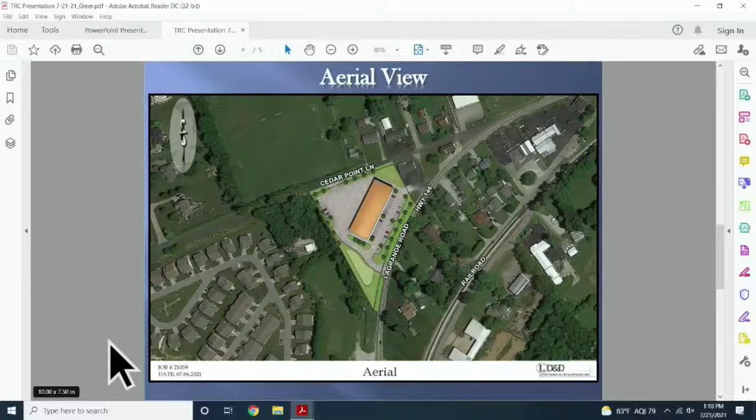You mentioned you're coordinating with the state with regard to the entrance on Kentucky 146, those two entrances. And as Tom McIntyre mentioned, the traffic impact study will be required based on the trips generated from the site and the volume of traffic on 146. We've been in coordination before this with the state and LD&D to coordinate the scoping of that already. That's already started, so that is the extent of my comments.

And I've got a letter here for you. I can give you the original if you'd like. Matt?

I really don't have any comments. We'll just probably end up using the 4411 address, and then we'll use suite numbers depending on how many applicants come in. We'll just permit them like that.

The only other thing I would say is just get with the LaGrange post office to see if there's going to be any requirements for centralized collection on 146. I'm not sure if they're going to want to come into the development to put up a box, so there might be something along 146 that they might or might not require. So that'd be the only thing.

Buckner. Oh yeah, Buckner. It probably would be Buckner. I'm not really sure, they have a weird setup. I would just contact them and try Buckner first. But that's it, that's all I have.

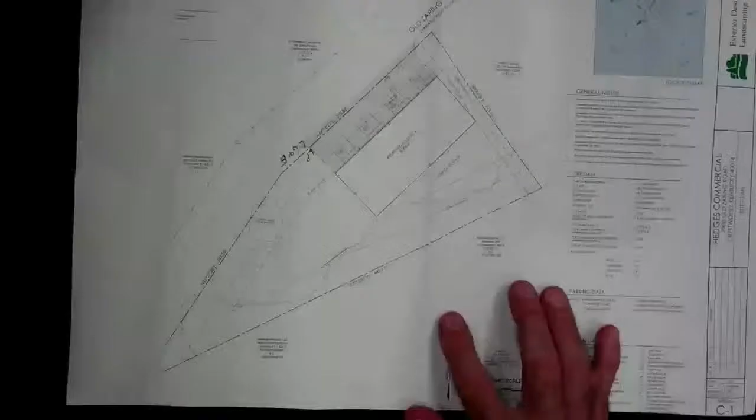So in order to accomplish what Mr. Hedges would like to do on the property, it's going to require us to have a zone change. The property is currently zoned R2. We're asking that it be rezoned to C1. It's just a little over an acre.

This plan was done by someone who used to work for Exterior Design, which is the company Mr. Hedges owns. The gentleman's name is Ted Bernstein, who actually works for LD&D. So when we update our plan after your comments, we'll have Mr. Bernstein from LD&D make those updates for us.

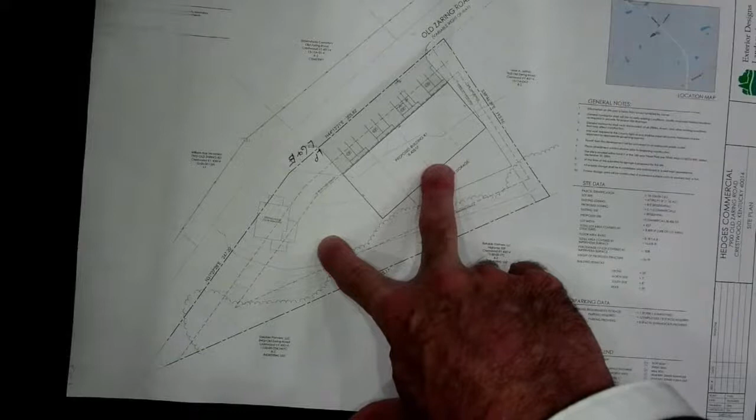What this shows is the property that was actually 2 lots, which have since been consolidated into a single property, a little over an acre of land on Old Zaring Road. The road goes back this direction towards the Rogers Group property. I don't want to say with absolute certainty, but the road, at least at the end, was closed. I don't know if it was closed all the way up to 329. So this is essentially a dead end road.

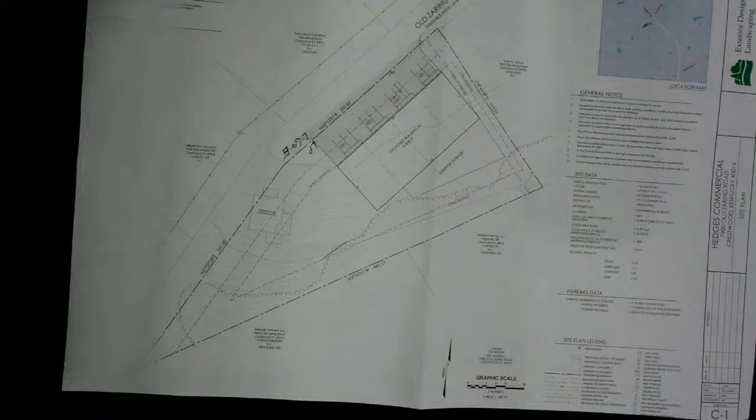There is some commercial across the street. There's R2 next door to us. There's a buffer area here in the back owned by Rogers Reliable Partners, and I think that's part of the old access road, if I remember correctly. The Apple Patch community is up this way, and then there's an area in this location.

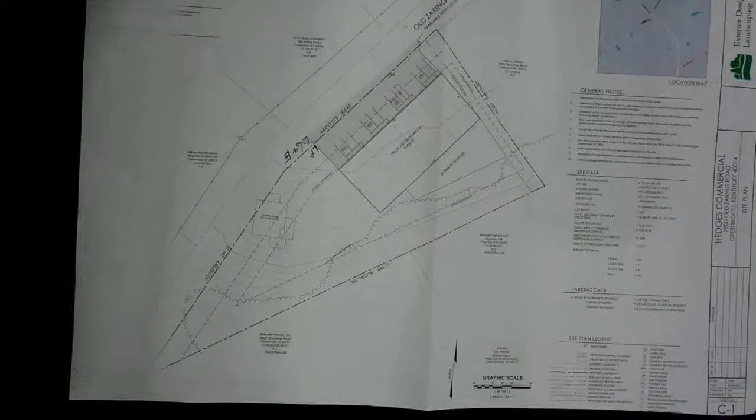We had a neighborhood meeting on Monday night. In attendance were 3 gentlemen whose family is primarily responsible for caring for that cemetery, which is affiliated with Brownsboro Baptist Church. They don't live in the area, they were just curious what was going on. Then the neighbor next door came, he's concerned about runoff and things like that, and he can obviously express all of his concerns. It's a fairly simple project—we're just asking to rezone the property and then construct this building.

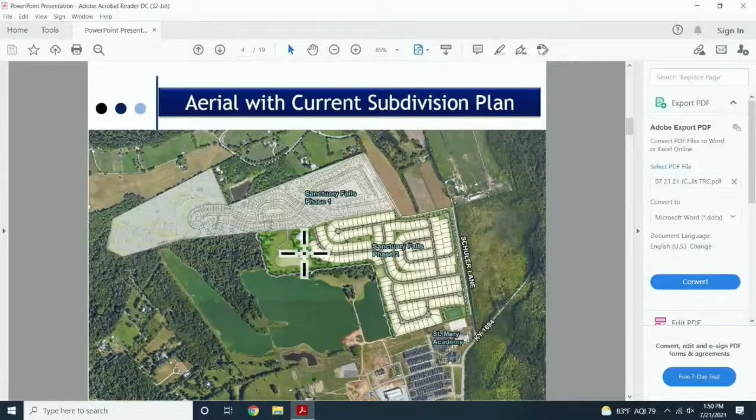We also have a stub, which will go to the future section of Norton Commons, and an additional entrance on Schuler Lane. So with phase 1 and phase 2, you'll have 2 entrances off Schuler Lane, an extra stub going through Norton Commons, and some interconnectivity to phase 1 internally as well.

This is the current subdivision plans. All the roads should be built to county standards with curb and gutter. The post-development runoff will be no more than the pre-development runoff, and you can see the detention basin to the left. This will be the entrance to the site.

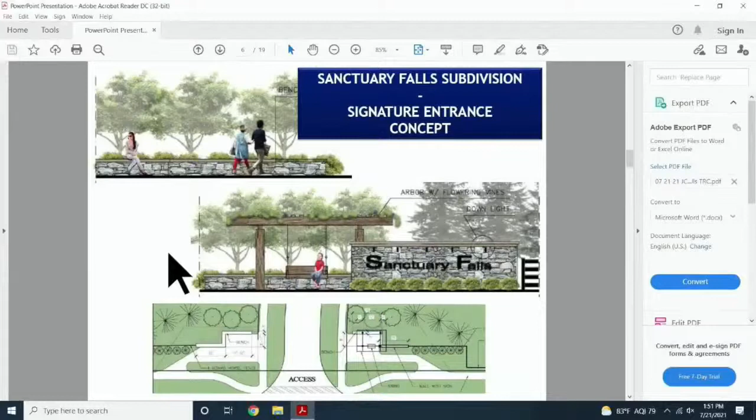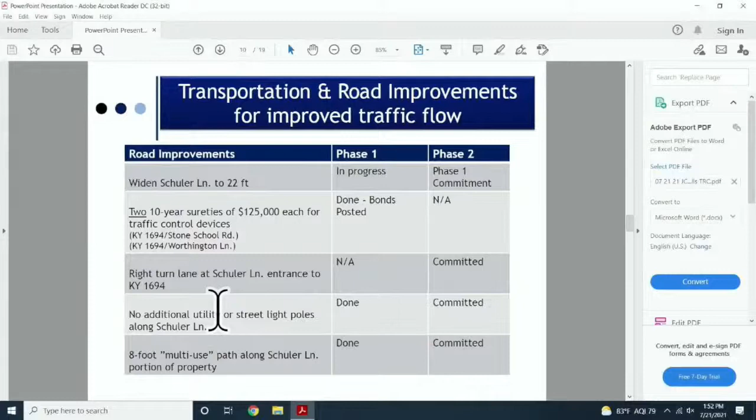We also, at phase 1, posted 2 10-year sureties of $125,000 each for the traffic lights in Jefferson County, and those have been posted. Similarly, we're committing to a right turn lane at the Schuler Lane entrance, and I have a slide on that. No additional utility or street light poles along Schuler Lane, and we'll also have an 8-foot multi-use path continuing from phase 1 all the way down Schuler Lane, encompassing the entire road. This is the slide showing the road improvements at Schuler Lane and 1694.

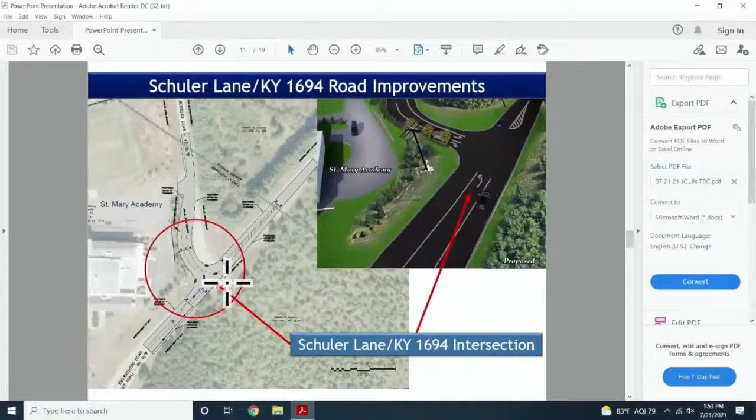Basically, you've got a left turn lane coming off 1694 into Schuler Lane, and you also have a dedicated right and left turn lane coming out of Schuler Lane, which should significantly help with the exiting of traffic there.

These are the binding elements. A lot of these are basically the same as what we had in phase 1. No rear yards facing Schuler Lane. We're going to have the 4-board black horse fence. If you'll go out there, you'll probably see that on phase 1 going up pretty soon, and that will continue all the way down Schuler Lane. Again, no additional utility or streetlight poles. We'll continue the multi-use path all the way down Schuler Lane.

The lighting conditions, that was important to some of the folks at phase 1. We'll basically have dark sky friendly lighting throughout. All homes will be lots on MSD sewers. There'll be no exterior construction activity at times that you typically would not want it, no trash or construction debris removal between the hours of 6 p.m. and 8 a.m. And we're also going to work with Louisville Metro Emergency Services and Oldham County Emergency Services to make sure there's not any issues with emergency services dispatch.

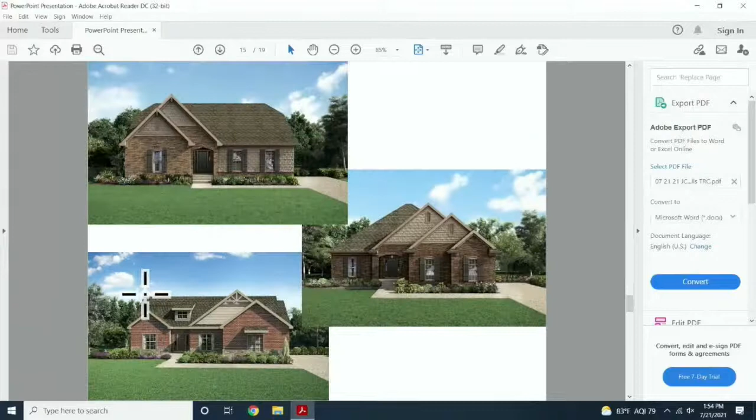These were some of the elevations. I'll just flip through these very quickly. And that gets us to our end. So we'll have the folks from Land Design and Development here to answer any technical questions. Thank you all very much for your time.

Thank you so much. So I'll start with the planning staff's questions or comments. The site address should reflect Prospect 40059, not Crestwood 40014. Tax block 4, lot 37, Jefferson County is listed in the title block, but unable to identify on the plan. Please clarify. Include a sketch map on the revised plan. Provide Schuler Lane preliminary widening and realignment plan as noted on the plan with all future submissions.

Include 50-foot right-of-way road cross-section on the revised plan. Include the cul-de-sac bulb radius on the plan. Include notation of the stormwater flow. All stormwater infrastructure should be placed in easements and reflected on the plan, and planning staff defers drainage comments to the county engineer's office. Include the location and ownership of lots along Pond Lily Street, lots 648 through 658. Consult with Matt Tolar, GIS manager, for street names and addresses. Include location of construction entrance.

Include the proposed size of water mains, gas, and sanitary sewer lines if applicable. Clarify mail delivery system type if cluster mailboxes are to be provided, and provide the location on the revised plan. The prior traffic impact study for phase 1 will need to be updated to include phase 2 of the development. The filing deadline for the August 24th, 2021 Planning Commission meeting is Wednesday, July the 28th.

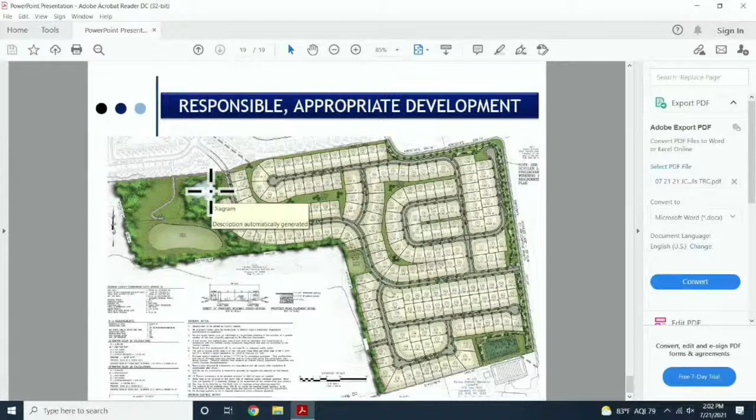Thank you. One other question. Does the applicant for phase 2 have unconditional rights to the detention basin? The proposed detention basin, yes. And will that detention basin suffice to serve this phase 2 in its entirety? There's actually going to be two, but the one that we're looking at here in the middle handles that. We have an existing farm pond, and then we have a detention basin associated with phase 1. So between the two basins, yes, it will be sized, and Mr. Sullivan will make sure we size it correctly.

My only comment for the agencies is more of a request, and that is in phase 1, it's my understanding when the traffic study was done, there was not much, if any, focus on the potential need for a traffic light at Schuler and 1694, and we would request a much more detailed focus on that issue. Thanks a lot. Thank you. Anyone else?